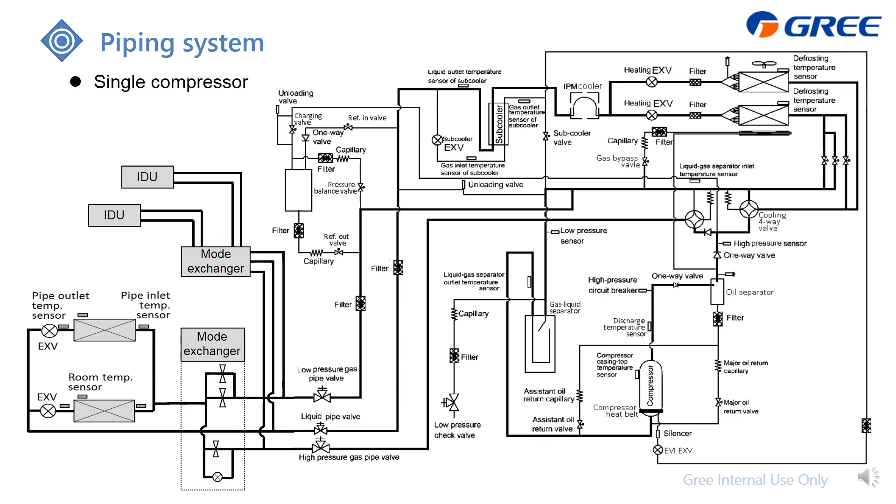And for this diagram, there are two mode exchangers with 4 indoor units. I will explain or introduce the inside components one by one for your better understanding. This presentation is divided into these 4 parts. The first part is sensors and switches.

First is the temperature sensor, also called thermistor. Its function is to detect the temperature, because itself is just a resistor whose resistance value is very sensitive to the temperature, which means if the outdoor ambient temperature changes, the resistance value will also change. And just like this picture, you can find that actually this one is the thermistor.

And then the PCB will check this resistance change, which means if the resistance value changes, the detected voltage also changes, so the PCB can get the information. And on the system, you can find the temperature sensors. This one is to detect the environment temperature, which is the outdoor ambient, and this is the indoor pipe temperature.

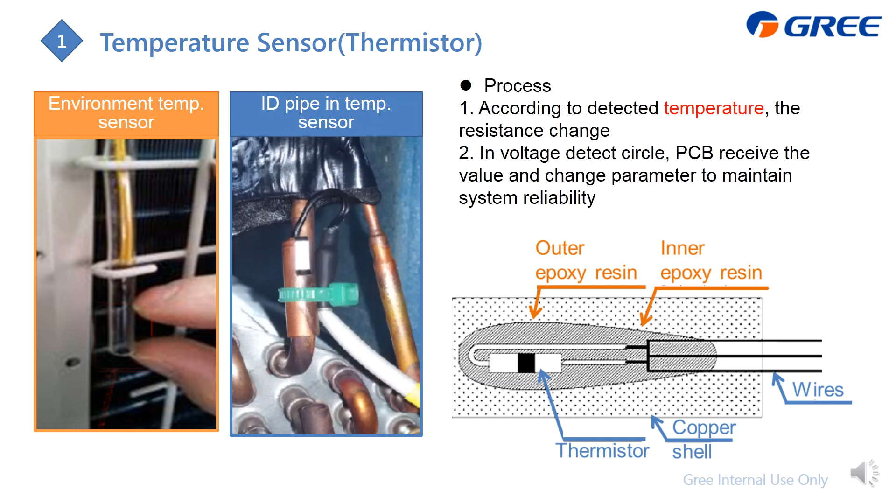Just like what I said, when the temperature changes it leads to the resistance value change, then the PCB detected voltage also changes. Then the PCB can get this information, and according to the information, the PCB will adjust the parameters and achieve control.

Inside the GMV system, there are 3 types of temperature sensor. The 50K ohm is for high temperature, located at the compressor discharge and also the compressor top shell. Next is the 15K ohm to detect low temperature, which is the outdoor or indoor room temperature.

The last is the 20K ohm. It's for medium temperature; you can find lots of these temperature sensors on the piping, including the defrosting, the subcooler liquid out and gas out, and also for the indoor unit, the pipe in and pipe out.

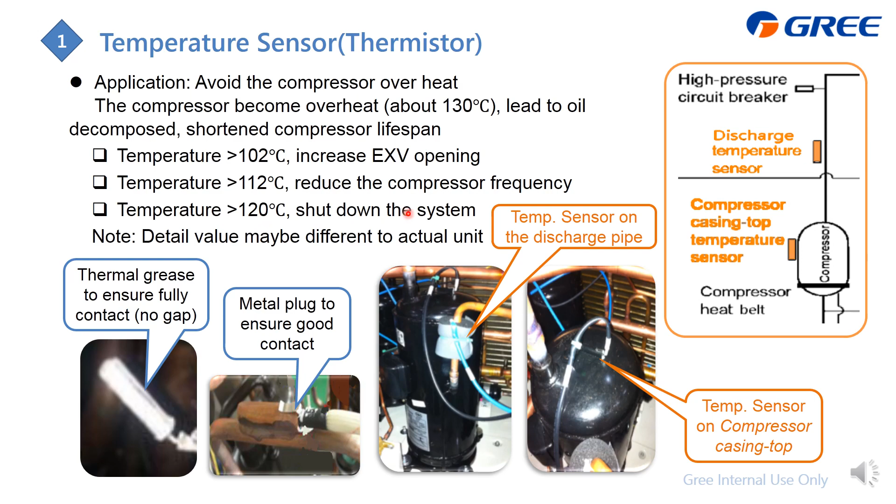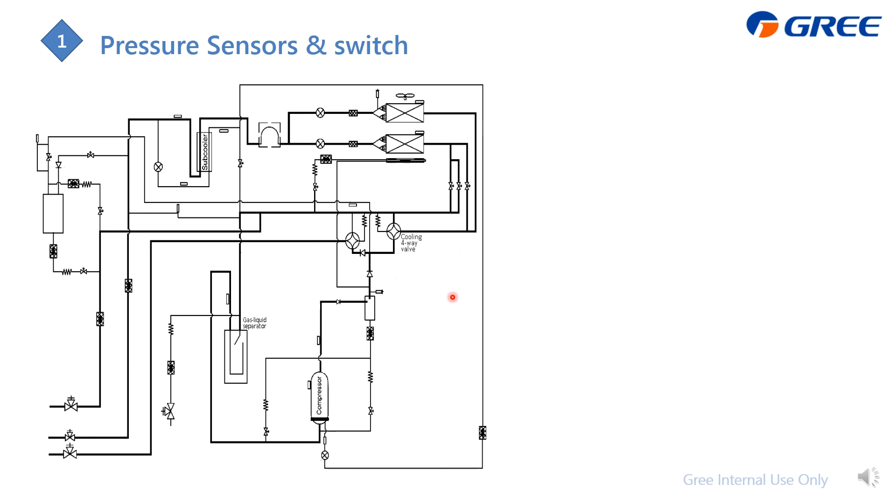Next, we will go to the pressure sensors and switch. This is the outdoor unit diagram. It just has the basic components. And we have the high pressure sensor, located here between the four-way valve and the oil separator. With a red color plastic bag, there is the high pressure sensor.

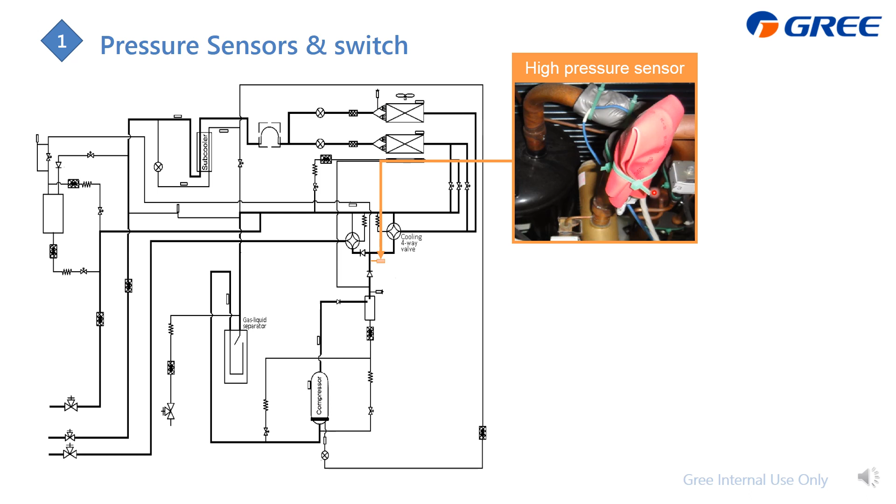Also, a high pressure switch or high pressure circuit breaker is located at the compressor discharge. And the low pressure sensor is located at the entrance of the gas liquid separator, which is at the suction side of the compressor, with a blue color plastic bag. This is the low pressure sensor.

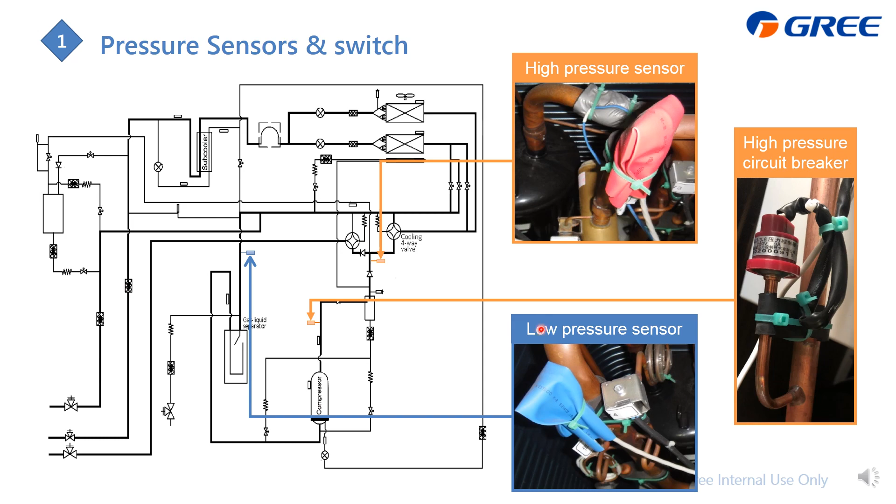First, we will talk about the pressure sensors. Their working theory is similar to the temperature sensor, but the detected item changes to pressure. When the pressure changes, it leads to the inside resistance value change, and then the detected voltage will also change. Then the PCB can get the information, and according to this, it will change parameters like the compressor RPM, fan RPM and EXV opening for system control.

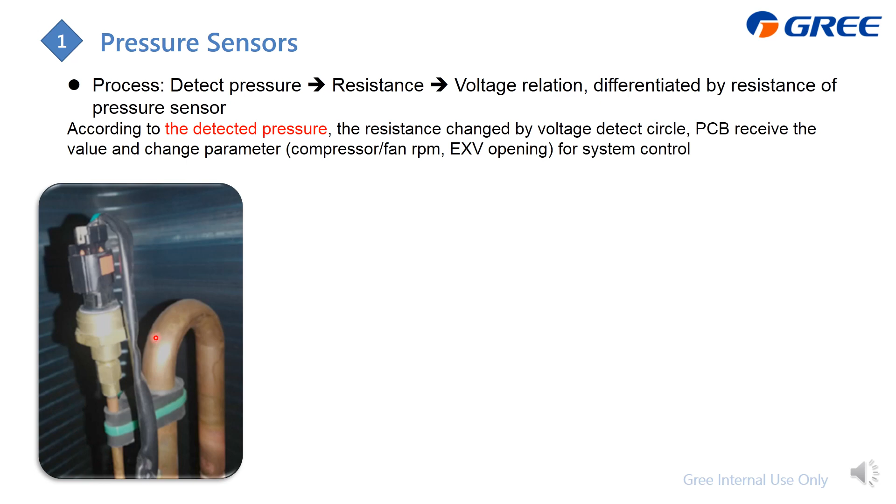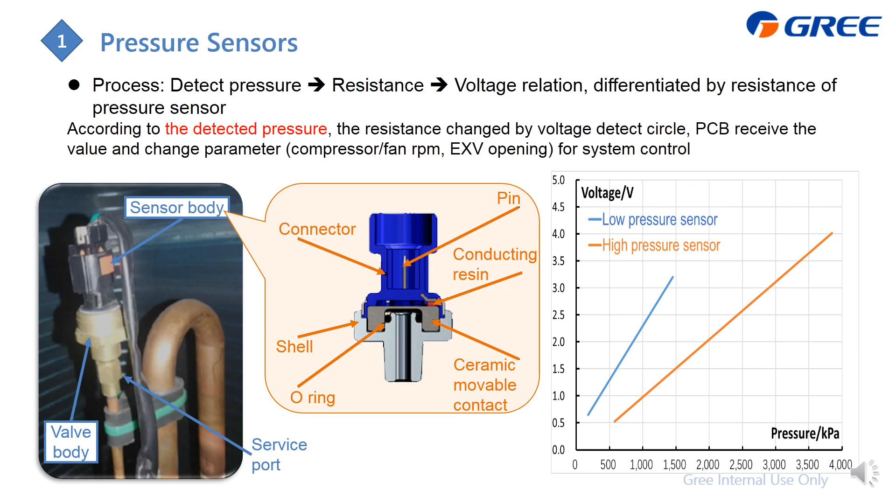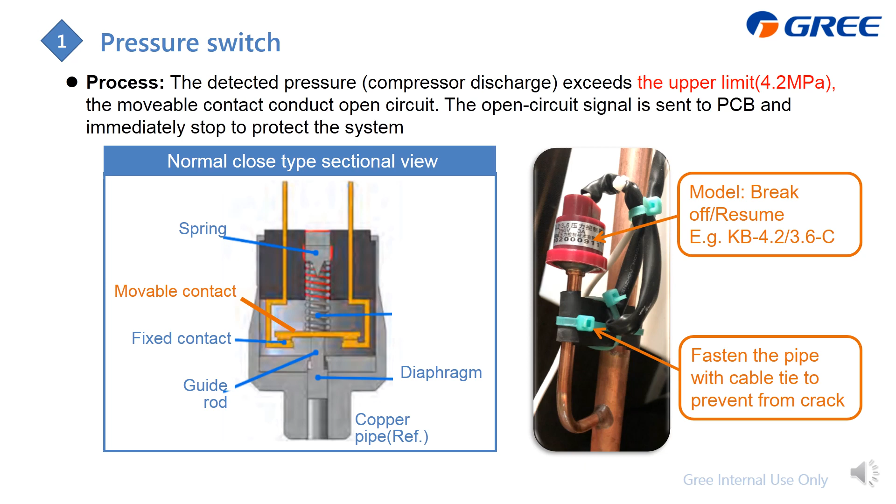That's all for this part of the presentation.